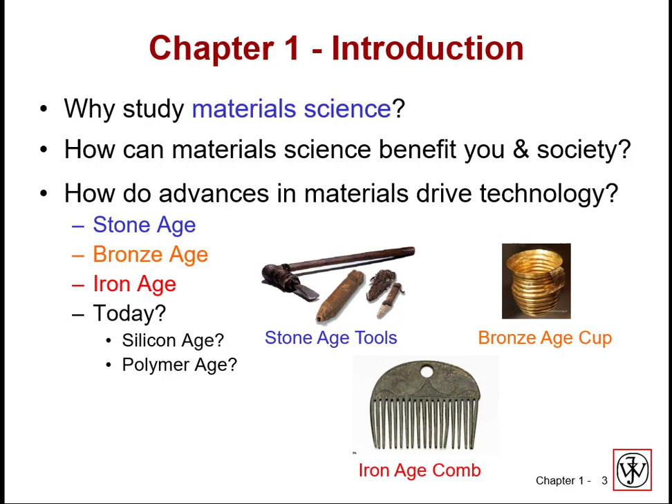Based upon chemical composition and atomic structure, we group solid materials into one of three basic categories: metals, ceramics, and polymers. Metals are composed of one or more metallic elements and often small amounts of non-metallic elements. Atoms in metals are arranged in a very ordered fashion and are comparatively dense.

As we shall see, metals are strong and can be readily formed into practical shapes. They tend to be ductile, meaning that they can be greatly deformed without fracture. They are also good thermal and electrical conductors.

Ceramics are compounds between metallic and non-metallic elements, commonly oxides, nitrides, and carbides. Common examples include aluminum oxide, silicon dioxide, silicon carbide, silicon nitride, porcelain, cement, and glass. They are stiff and strong. Most conventional ceramics are brittle, however. Brittle is the opposite of ductile. They also tend to be poor conductors of heat or electricity.

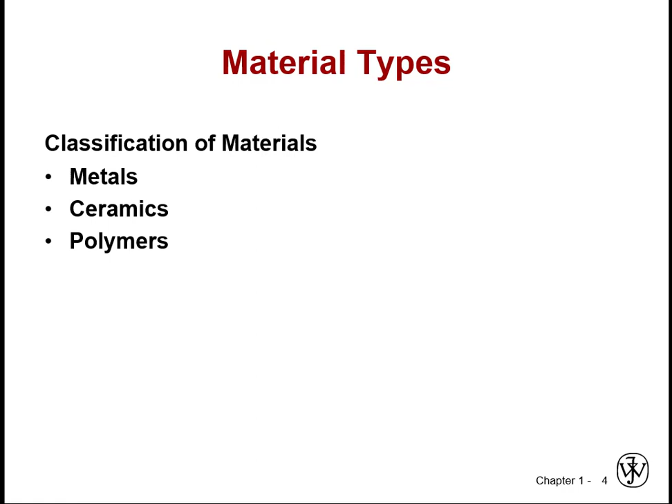We will expand upon this list slightly to include composites, which combine two or more of the above to achieve properties that neither possesses. We will also sometimes speak of glasses as separate from ceramics due to how useful they have proven to be.

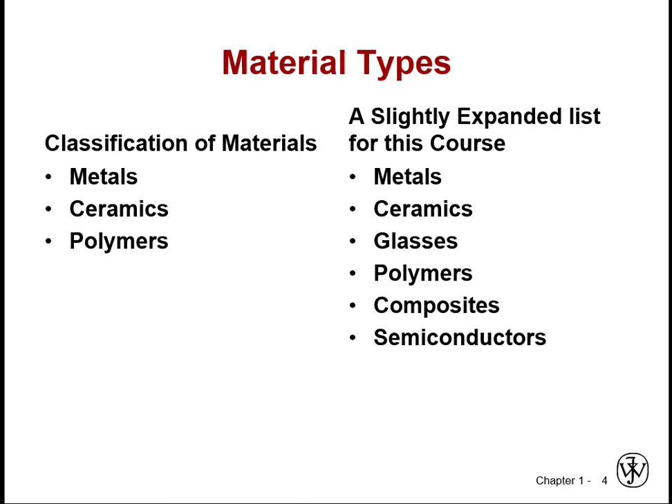Similarly, we will also spend a fair bit of time discussing semiconductors, as they too have had a remarkable impact on society. One area of recent growth in material science is biomaterials. As improvements in nutrition, medicine, and engineering have led to increased lifespans, new needs have emerged.

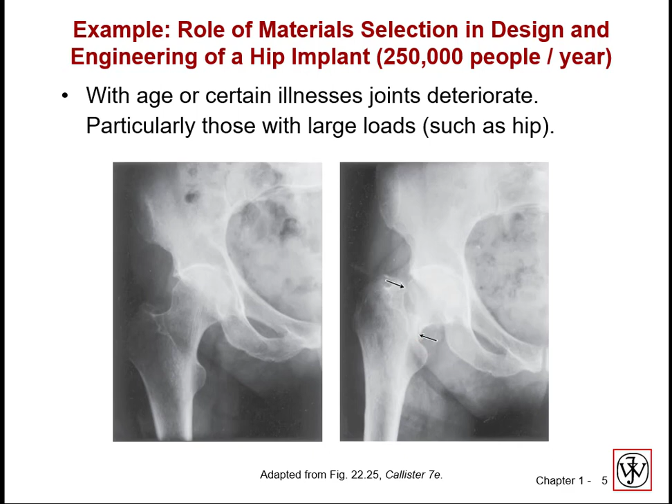What considerations would we need to keep in mind as we design a hip implant? Well, it should have good mechanical strength, capable of carrying significant loads, and capable of having the load applied and removed many times. As it is a joint, good lubricity is essential as it needs to rotate. Finally, it needs biocompatibility. Neither of the above considerations will matter if the body rejects the implant.

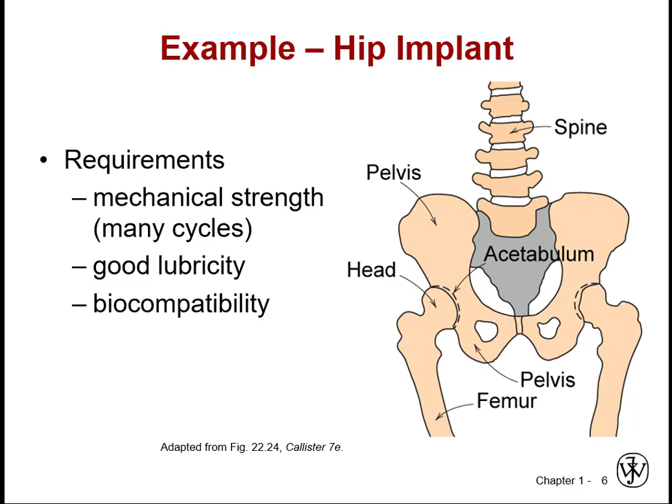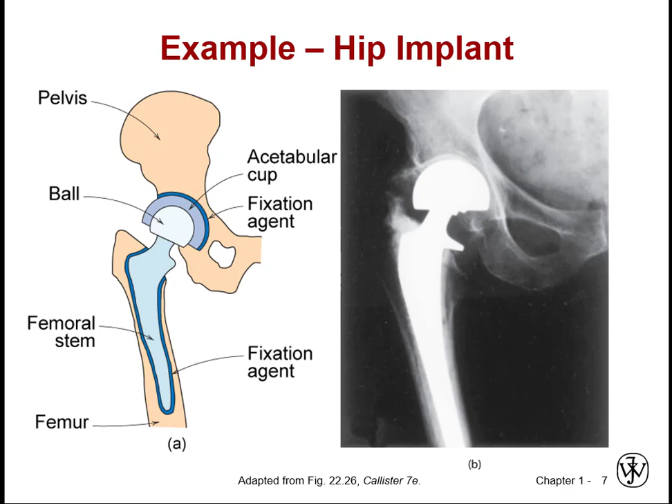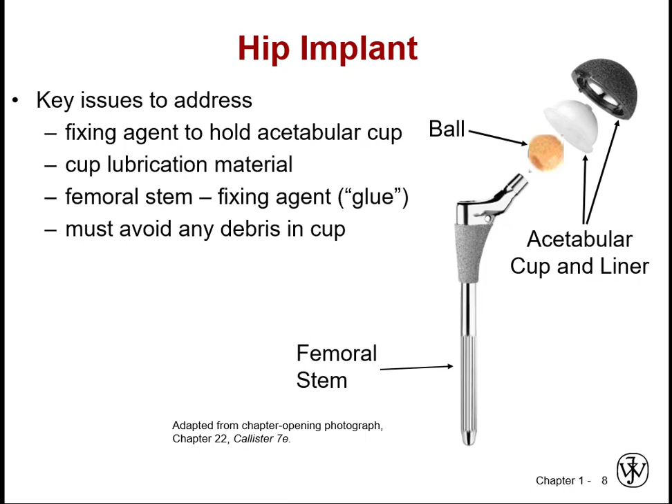Design process is an essential part of engineering and can be useful even outside of your engineering life. The material selection process is briefly outlined here. First, decide upon what the application or task is. Consider what material properties are required or essential to carry out the task. What material properties would be desirable for the task?

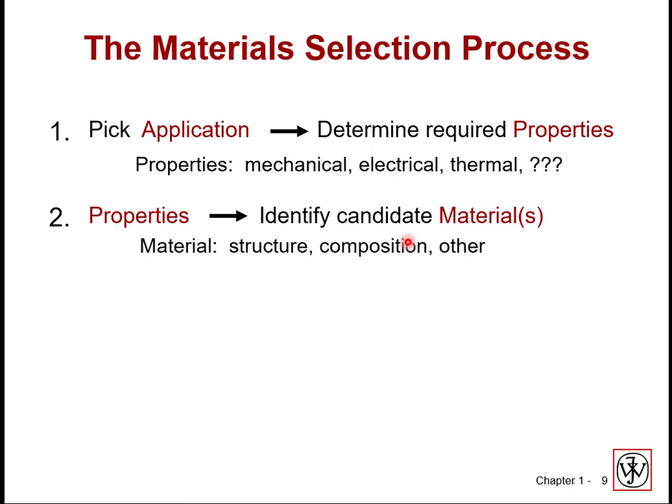Next, identify materials that possess these properties. And finally, consider the processing required to make the material suitable to the application or task.

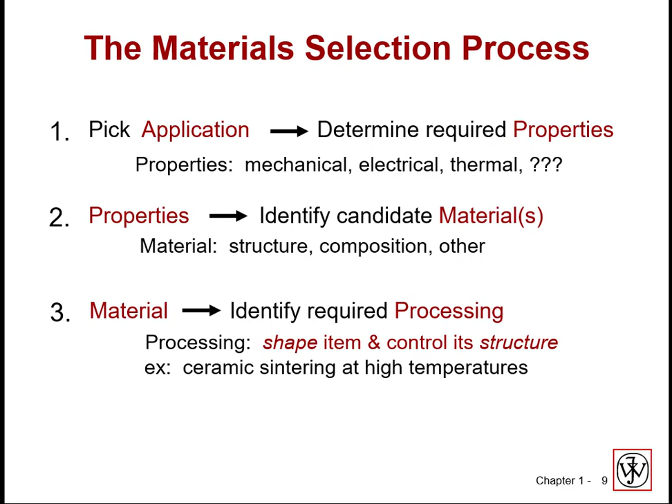Metals have high thermal and electrical conductivity because valence electrons are free to roam. Metals tend to be stiff, strong, ductile, and have high thermal and electrical conductivity. Polymers and plastics tend to be flexible, ductile, much lower in strength, low density, and tend to be thermally and electrically insulating. Ceramics tend to be stiff, strong under compression, but brittle. Ceramics are thermal and electrical insulators.

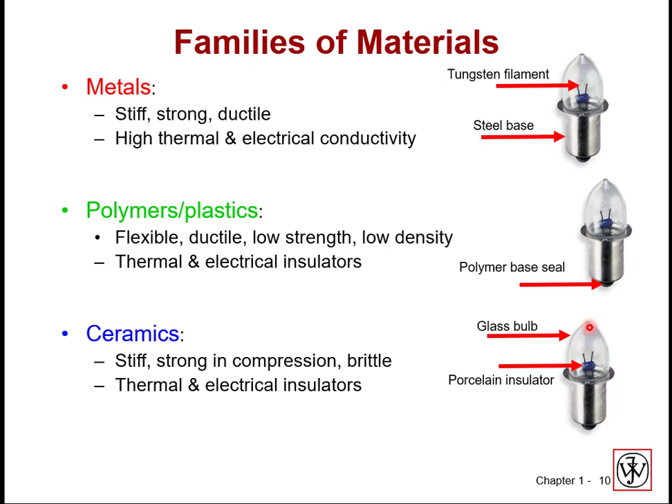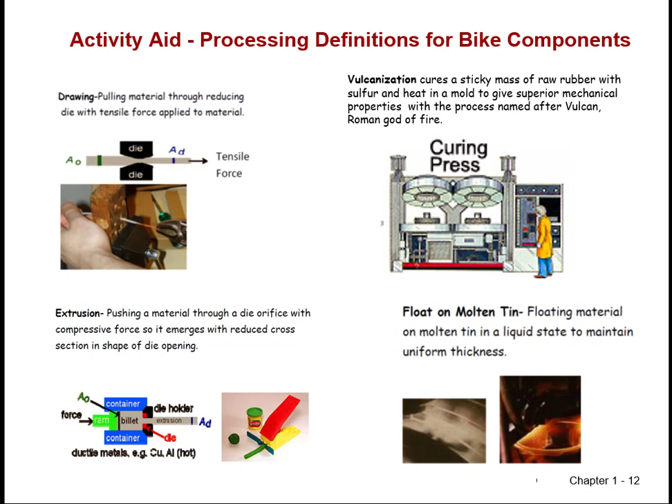Vulcanization cures a sticky mass of raw rubber with sulfur and heat in a mold to give improved mechanical properties. Float on molten tin: floating material on molten tin in a liquid state to maintain a uniform thickness of material. With that in mind, now I would ask you to go back to the prior slide and try to complete the exercise. Please let me know if you have any questions.

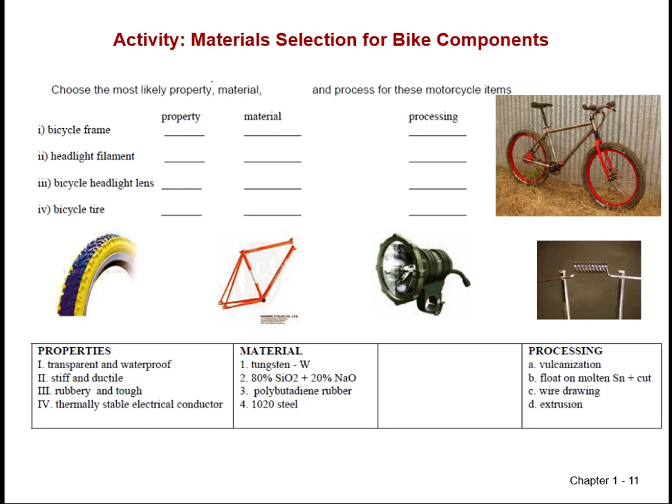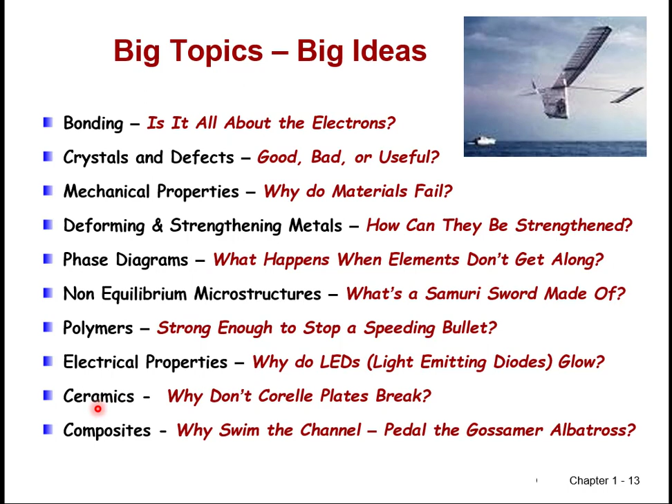We will discuss many topics over the course of the semester, so a good breakdown of the topics is as follows: bonding, crystals and defects, mechanical properties, deforming and strengthening metals, phase diagrams, non-equilibrium microstructures, polymers, electrical, and possibly magnetic and optical properties, ceramics, and composite materials.

Here is what I hope that you take away from today's lecture and from the first chapter reading. 1. We can identify important materials, families, and properties. 2. We know the role of materials selection in the engineering design process. 3. For a new problem, we can go from design requirements to material selection. And 4, we can relate a material's type to its properties to processing.